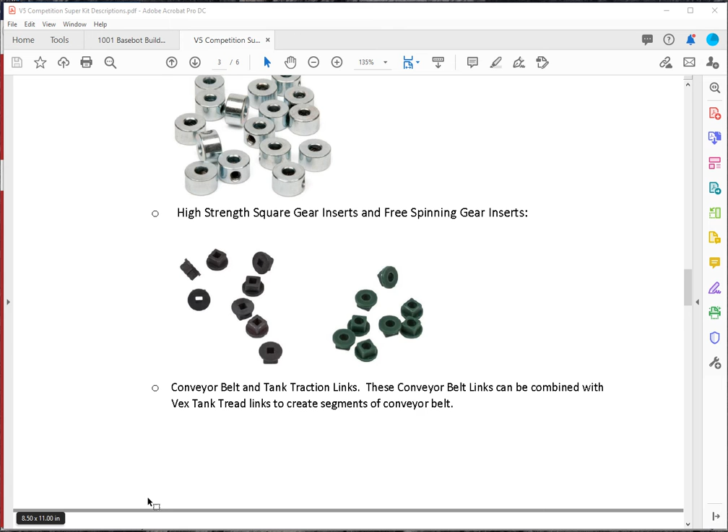This is video B of building a VEX V5 robot in SolidWorks, and we're just finishing up with this. Again, just some information about some of the parts that are available.

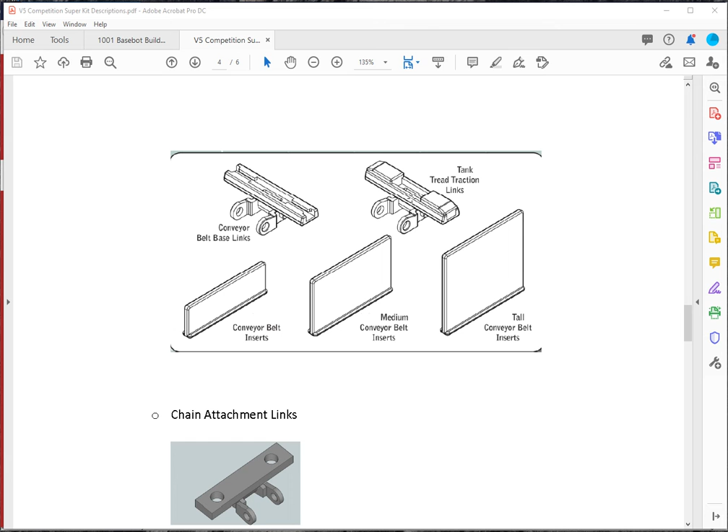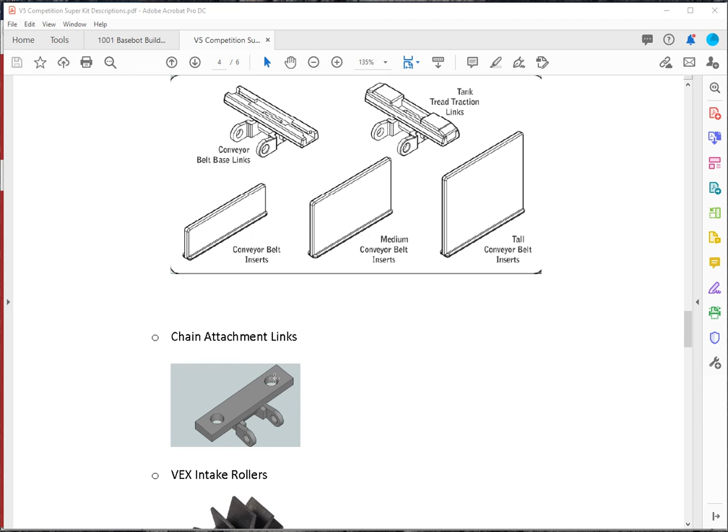You can create VEX chain, and you also have these inserts that you can put on the chain. This insert allows you to slide one of these tabs in here, so if you're collecting a ball or something like that, that might be useful. You can also put these together to form a tank tread, and then they have these chain attachment links with bolt holes, so you can bolt something to the chain. Maybe you have some kind of linear lift, and you want to bolt something that the chain can pull up and down or back and forth.

And then there's these VEX intake rollers. And here's a little bit of information about the V5 motor. You can see that the no-load speed is 200 RPM, and the stall torque is 1.05 Newton meters.

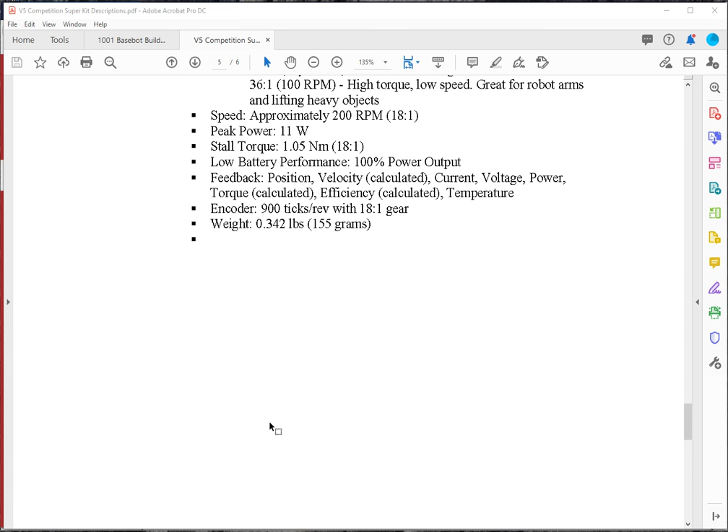These motors are actually pretty sophisticated. They're not just a simple DC permanent magnet motor, they have a lot of intelligence. There is inside there a permanent magnet DC motor, but you can get torque. It's a pretty sophisticated motor.

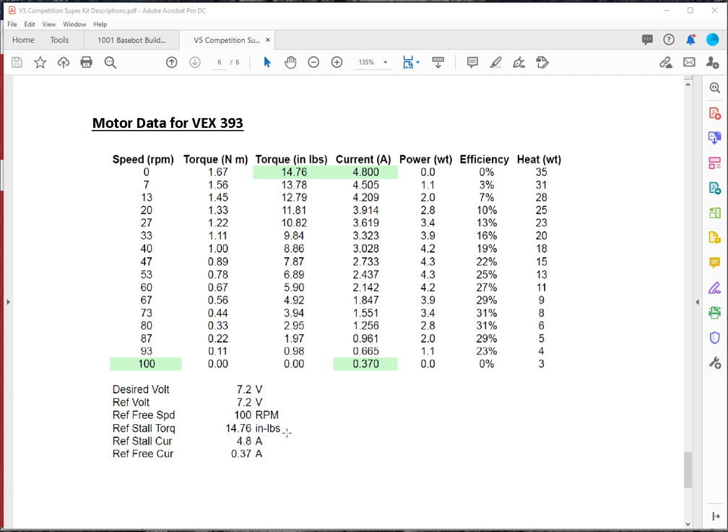And then of course you can also use the VEX 393 motors for your project if you want to. The advantage to this motor, it's not as powerful. It has a stall torque of 14.76 inch-pounds and a no-load speed of about 100 RPM, but they are quite a bit lighter than the V5 motor. So if you don't need as much power as you have with this motor, you can use the 393s.

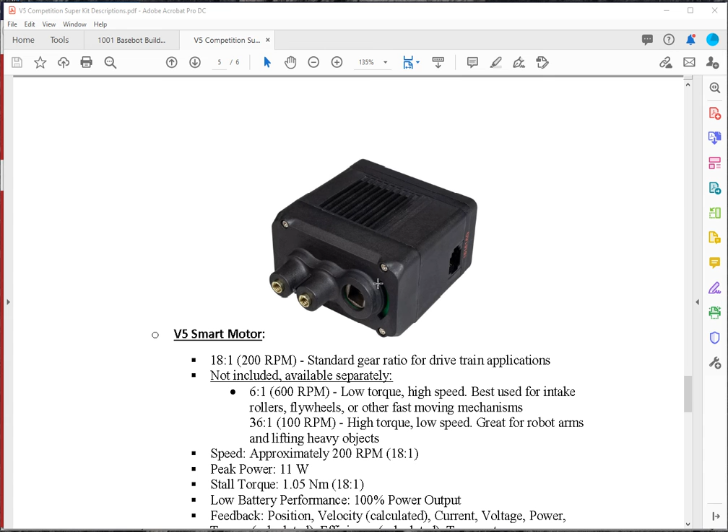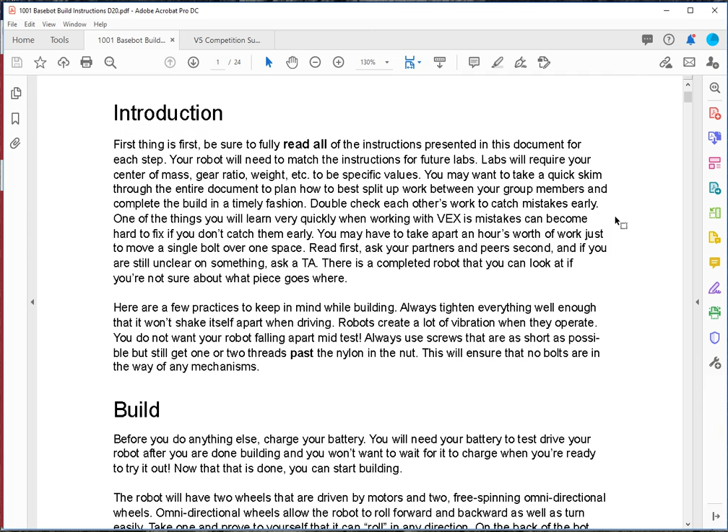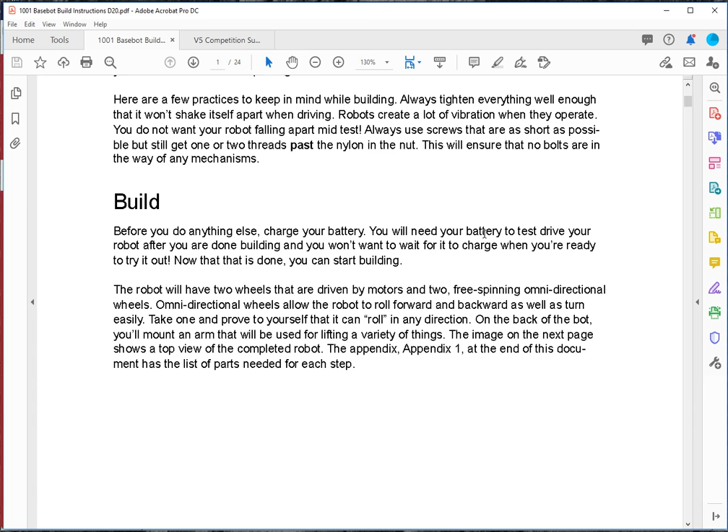Okay, so we have this document right here, the 1001 Basebot build document, and these instructions were for if you actually were building the actual robot, but we can use them to build our SolidWorks robot. So you can read through this, and there's a picture of what the robot will be when it's all put together.

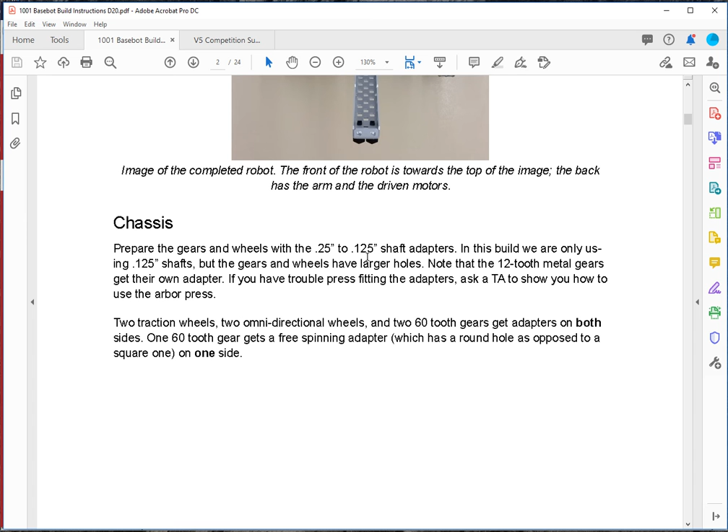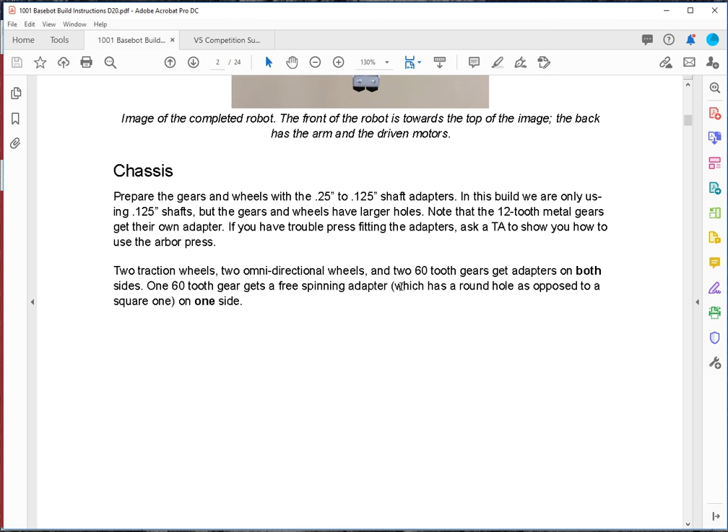This note says that we have gears and wheels that have a 1/4 inch square, so we want to use the adapters. It says we should get all the wheels ready with these adapters on both ends, and one 60-tooth gear will have a free spinning adapter with a round hole on the other end. So that's what we have here.

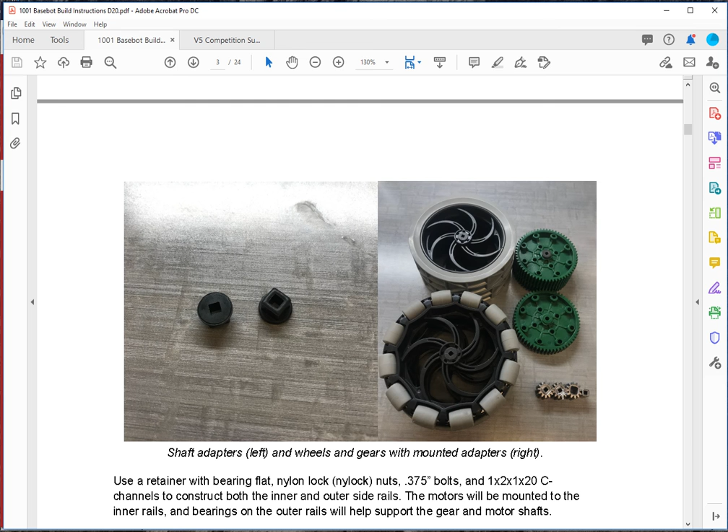So here are the adapters, and the SolidWorks models that we have of the wheels, both types of wheels, and the small gears already have an 1/8 inch hole, so you don't have to worry about those. But we will put the inserts into these 60-tooth wheels. So let me just open up SolidWorks here.

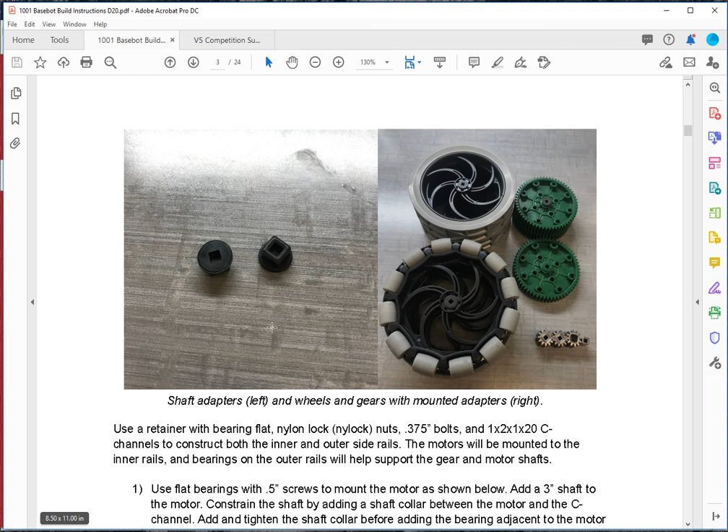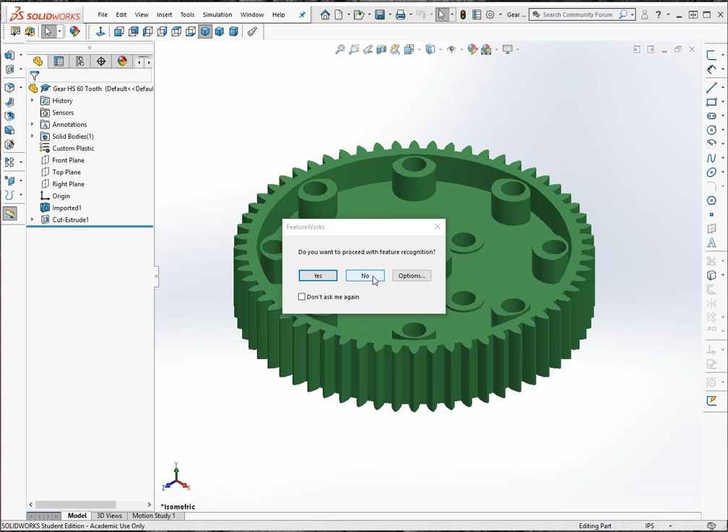Okay, so the first thing I'm going to do is open up the parts that we need. So we're going to grab the high strength gears, and right now we want to grab 60 tooth. You can see I get this message, do you want to proceed with feature recognition? So I'll say no. And then we want to open up and grab some of the adapters.

So there's one adapter, and we'll open up the other type as well. I'll say no on the feature recognition. So you can see I'm just going to put on the edges visible. You can see this one goes from 1/4 inch to the hole for the 1/8 inch square shafts, and I'll have to pick up here on the next video.